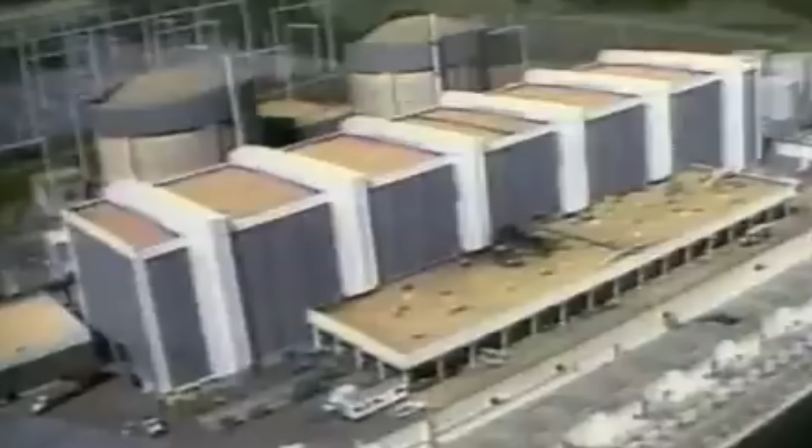Because frankly, even though it was a level 5 and was the worst accident involving a nuclear power plant in American history, it really wasn't that bad at all in the grand scheme of things.

But there were numerous failings that led to the accident, mostly involving proper training for the personnel, as well as a design flaw with a single valve.

But a true disaster was mitigated by a lot of automatic safety features that did work as intended. Thus, what happened at TMI is not classified as a full-tilt nuclear meltdown. It was a partial meltdown, and it was safely contained, thanks to the overall design elements of the reactor itself.

The 3 Mile Island nuclear power plant started construction in 1968, and would wind up with 2 different nuclear reactors. TMI-1, or Unit 1, would go online on September 2nd, 1974, and Unit 2, her sister, went online December 30th, 1978.

They were both built by Babcock and Wilcox, and both were PWR designs, or pressurized water reactors, but they were not identical twins. They were slightly different. Reactor 2 was larger than her older sister, but they worked in pretty much the same way.

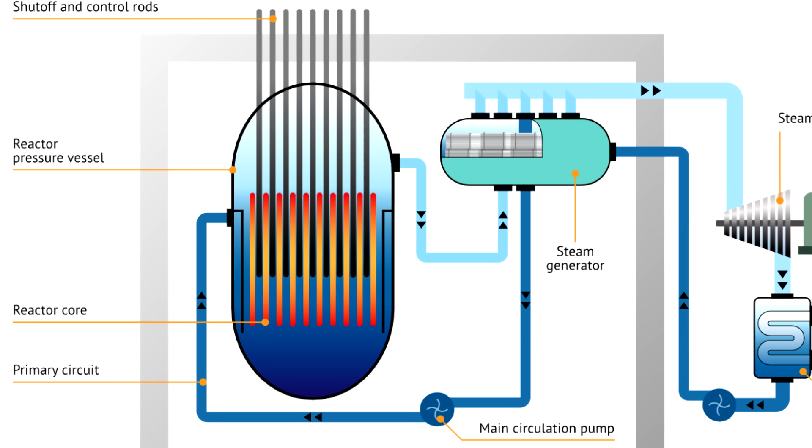A PWR differs quite a lot from an RBMK reactor that the Soviets used and was involved in the Chernobyl disaster. A PWR, pressurized water reactor, is a light water nuclear reactor, a type of thermal neutron reactor that uses just regular old water, not heavy water, just regular water that you would drink, as both the coolant and the neutron moderator. They also use a solid form of fissile elements as the fuel.

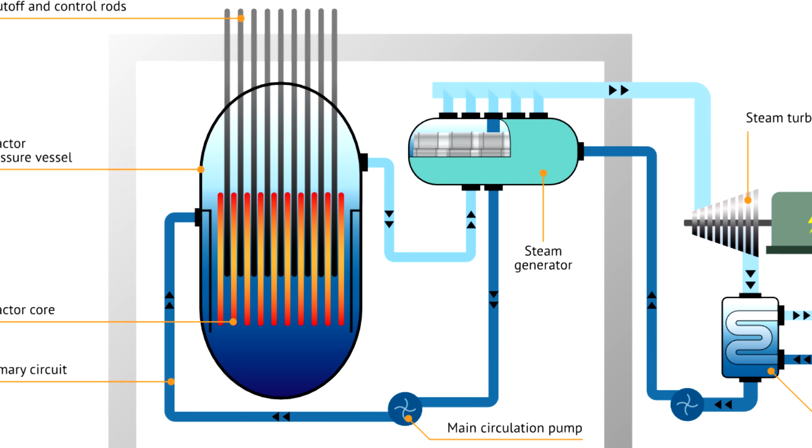PWRs are actually quite common and constitute a significant majority of the nuclear power plants all over the world. And the reason is simply that they're exceedingly stable and generally pretty safe.

The way these work is that the nuclear fuel in the reactor pressure vessel is engaged in a controlled fission chain reaction. That produces heat, which heats the water in the primary coolant loop. The primary coolant, which is water, is pumped into a heat exchanger, which is just a steam generator, which flows through several thousand different small tubes.

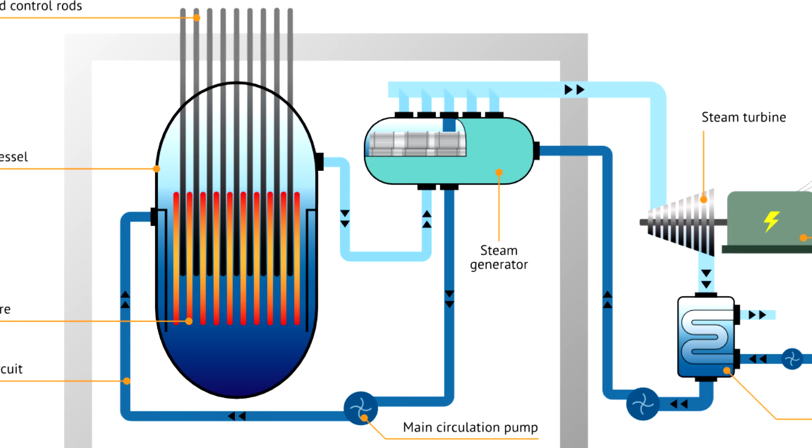The heat is transferred through the walls of those tubes to the lower pressure secondary coolant lines. The secondary coolant evaporates into pressurized steam, and as a result of this, the transfer of heat is accomplished without actually mixing the two fluids.

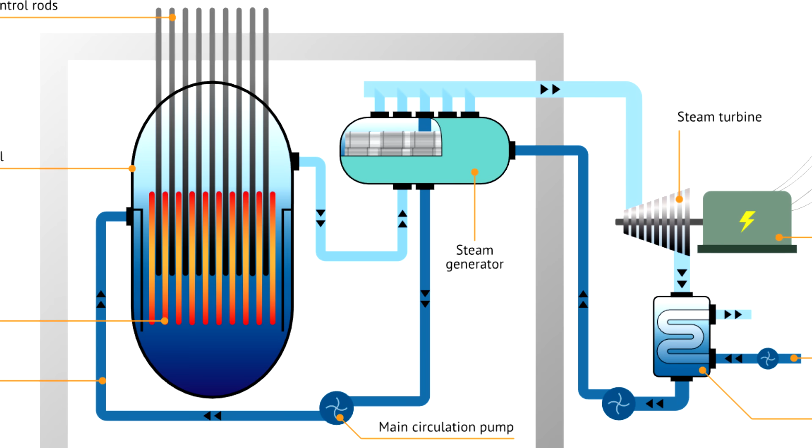Both sets of coolant water don't actually touch. And the reason for this is that it prevents the secondary coolant from actually becoming radioactive. Remember, the primary coolant loop is going through the reactor, so that water is becoming irradiated. But because it's not touching the secondary coolant, that water stays pure and only receives heat to become steam.

And the pressurized steam is fed through a steam turbine and produces electricity. It's a novel concept, and again, this type of design is extremely stable.

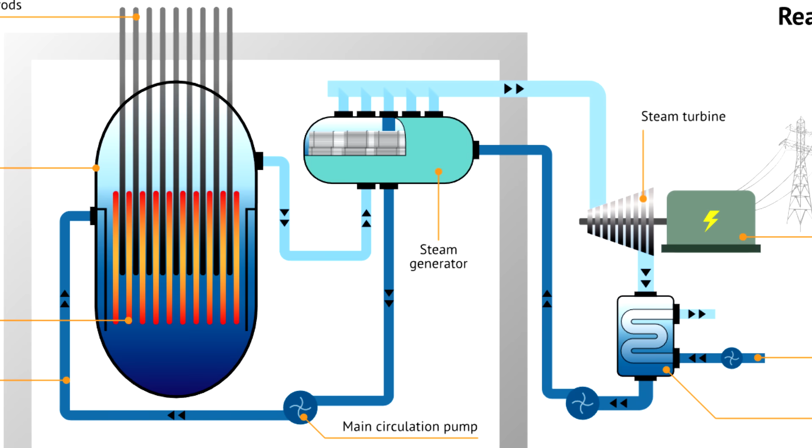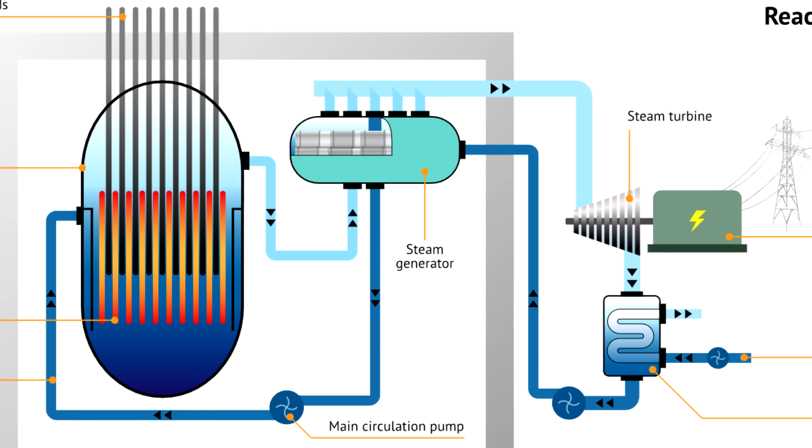Part of the reason is that they have a tendency to produce less power as the temperatures increase, which is good because part of the design requires the coolant to actually be quite hot all the time. That's why it's a pressurized water reactor.

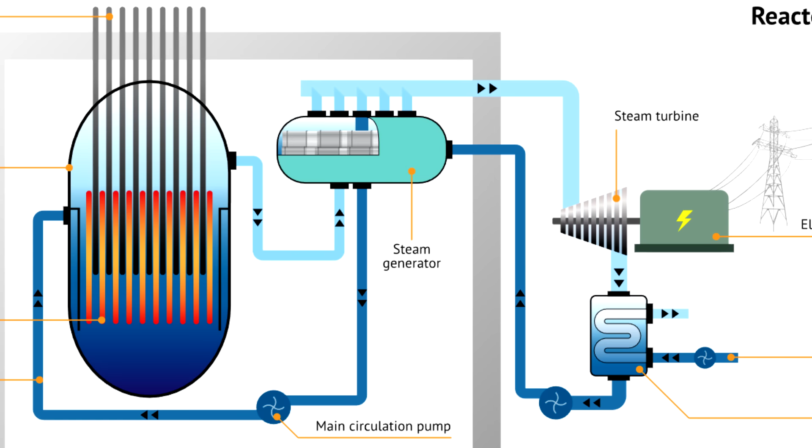Because the water has to be at a much higher temperature, it actually exceeds the normal boiling point of water. But it has to stay as a liquid in order for this system to work, which is why it's pressurized. Water under pressure doesn't become steam quite as readily as standing water would. If you pressurize it, it'll stay in a liquid state even if the temperature exceeds the normal boiling point of water. Thus, the whole system is highly pressurized, with PSIs into the thousands.

It can vary depending on what power output we're talking about, but much higher than, say, a steam locomotive, for example, that isn't a high-pressure design anyway.

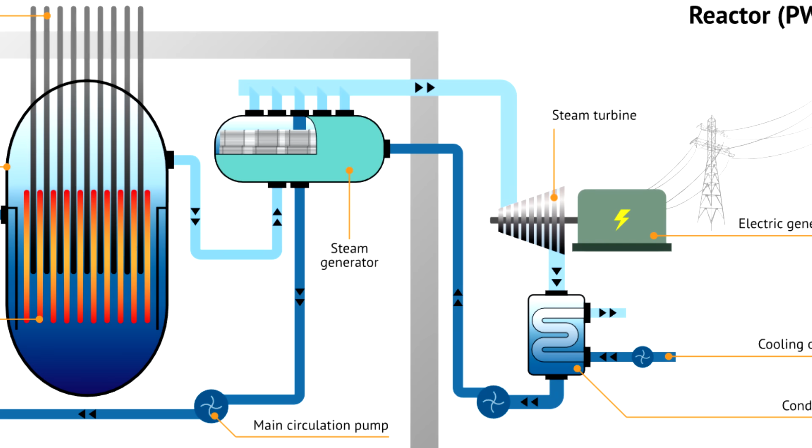But that means the system has to be very well built in order to contain all that pressure. The piping has to be extremely strong, and therefore it can be a lot more expensive to build this design in the first place, and it is also very susceptible to corrosion. You don't want corrosion on any of these pipes at all because of the higher pressure.

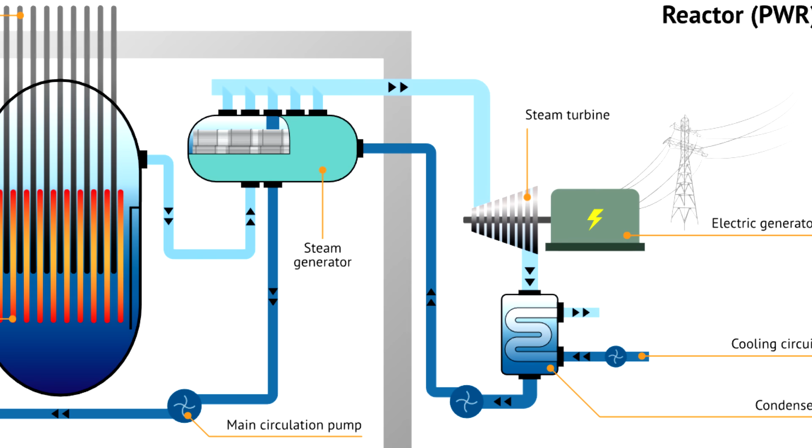Corrosion naturally weakens metal, and if metal weakens, you can get a burst, and that can result in what's called a loss of coolant accident, or LOCA. This is a very specific mode of failure for a nuclear reactor, and it can lead to reactor core damage, and is in fact pretty much exactly what happened at TMI. It was a LOCA, but it didn't start out that way. In fact, the situation was a cascade of rampant stupidity and silly mistakes.

The date was March 28th, 1979, though the actual situation started hours before. Reactor 2 was not very old. She'd only been commissioned in December the previous year. It was only a few months into operation, so she was effectively brand new. At the time, TMI 2, as she was known, was running at 97% power, almost full. The reason for this is that her sister, number 1, was off completely. She was shut down because they needed to refuel that one. So 2 was running pretty hot in order to pick up the slack.

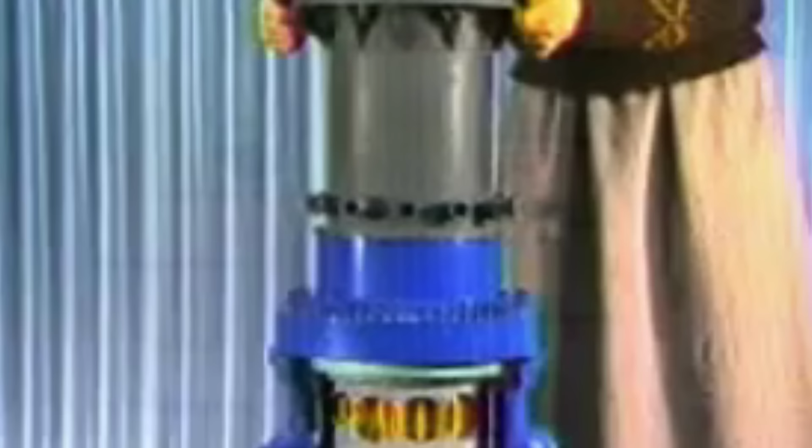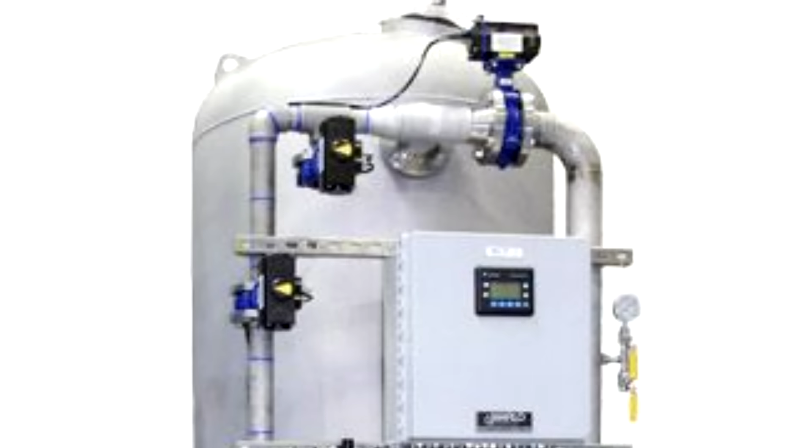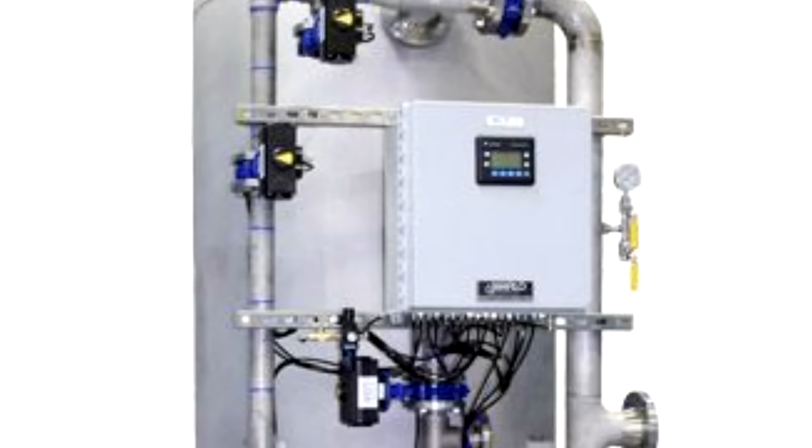The beginning of the chain of events that would lead to the accident actually started on March 27th, though, 11 hours before the actual accident started. What happened was the operators were doing what was effectively routine maintenance. They were trying to unblock one of the 8 condensate polishers. These are devices used to filter water condensed from steam, and their job was to keep the secondary loop within the reactor clean. But these polishers were resin, and they had a tendency to let little bits get into the water and cause blockages. This was a normal problem that was run into all the time at the plant.

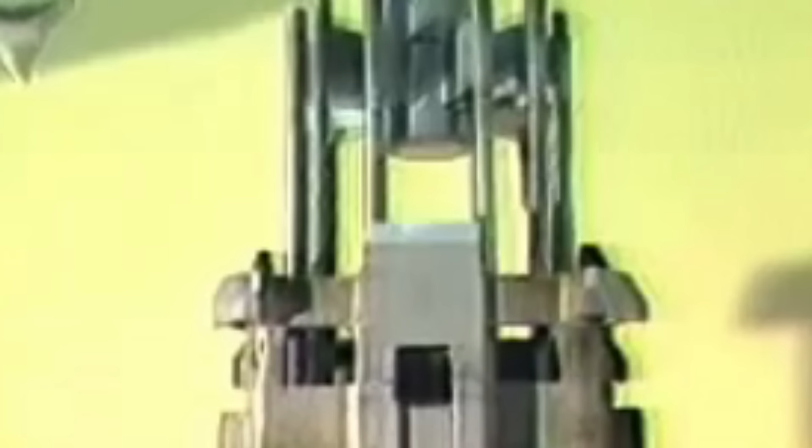The workers were pretty used to it, and generally what they did is use compressed air to force the blockage out. And in almost every case, that worked. But not this time. This particular bit of resin was very, very stuck, and the compressed air didn't make it budge. So they decided to incorporate water into the fix, and use the air to force the water forward and let the water, which was heavier, clear the resin. That did technically work. But in the process of doing this, they had unknowingly caused a very small amount of water to push through a stuck open check valve, and eventually come to rest into an instrument air line. It would lead to the accident beginning around 4 a.m.

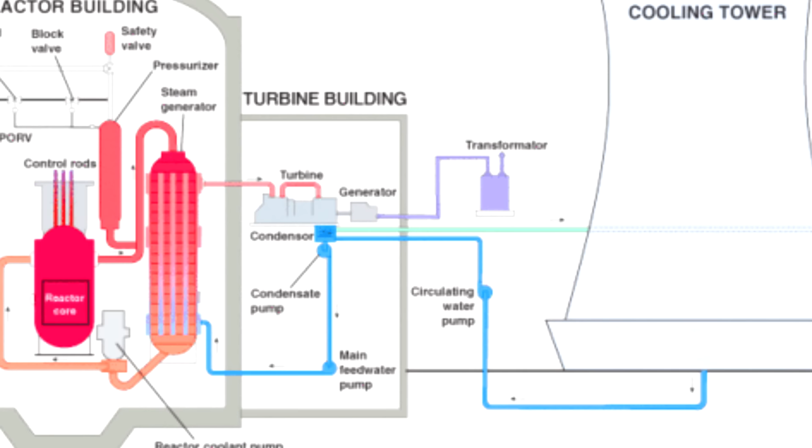Because of the water, the feed water pumps, condensate booster pumps, and the regular condensate pumps shut down all at once, leading to what's called a turbine trip. That is an automatic safety shutdown of the steam turbine that happens if really anything that's weird is detected within the system overall. It's a safety device to avoid turbine damage or any kind of problems. If there's something wrong that the system detects, it will just shut the turbine off until the issue is resolved. That on its own probably wouldn't have been a big deal, but the pumps being shut off was.

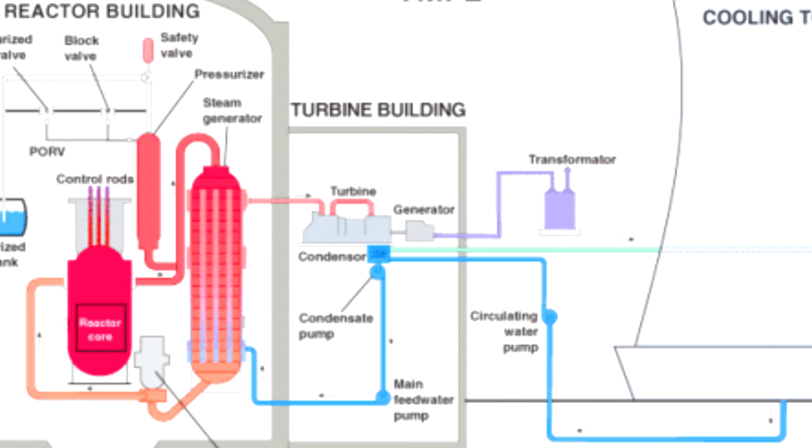Remember, water in a PWR is both a neutron moderator and the coolant. Getting fresh feed water into the system is imperative for stable function. With the pumps off, that came to a standstill, and the steam generators weren't receiving any feed water at all. So heat transfer from the reactor coolant system, or RCS, dropped significantly, and the temperature began to rise. With the temperature rising, the water expanded, as it naturally does, causing it to surge into the system's pressurizer. That caused a pretty large steam bubble to form at the top of it, and as the expansion continued, the pressure in the system rose to dangerous levels, up to 2,255 psi.

But, once again, there were safety devices in place just in case this sort of thing would happen. The system had what's known as a pilot-operated relief valve, or PORV. Once it reached the 2,255 psi, that valve was automatically opened. It was a safety valve, and it allowed the steam to escape through piping to the reactor coolant drain tank, which was located in the containment building basement.

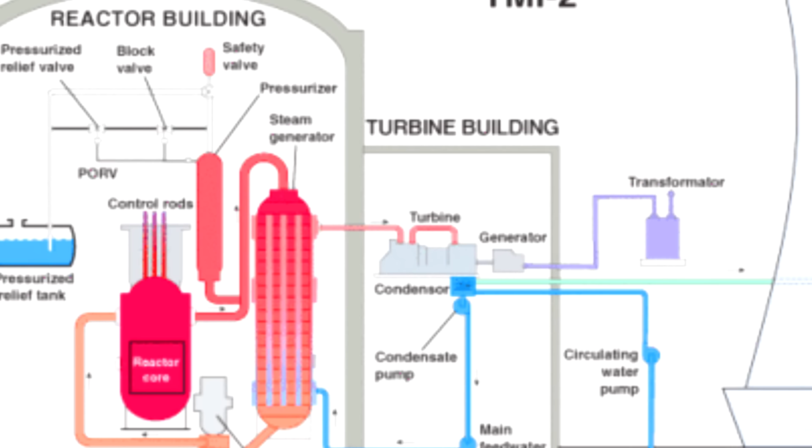But because of the excessive heat, the water continued to expand, and the relief valve wasn't removing enough of the steam to drop the pressure very fast, or at all. The pressure continued to rise, but fortunately there was yet another safety device that activated automatically in this type of circumstance. The Reactor Protection System, or RPS, had a trip set point of 2,355 psi. If that was reached, and it was just 8 seconds after the turbine tripped, the reactor itself was

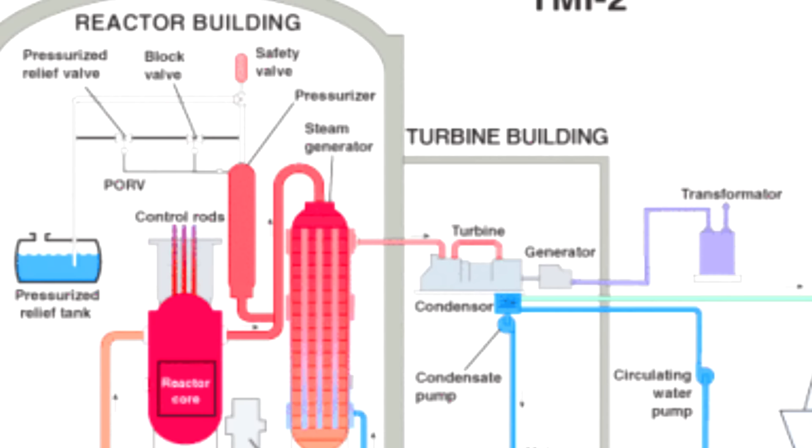also tripped. All the control rods were released and allowed to fall back into the core using the most reliable and abundant force available on our planet: gravity. They just fell back into the reactor. That's how it was designed. It was quite ingenious and simple. And the control rods worked. They did their job. They dropped into the core and halted the nuclear chain reaction, effectively shutting the reactor down.

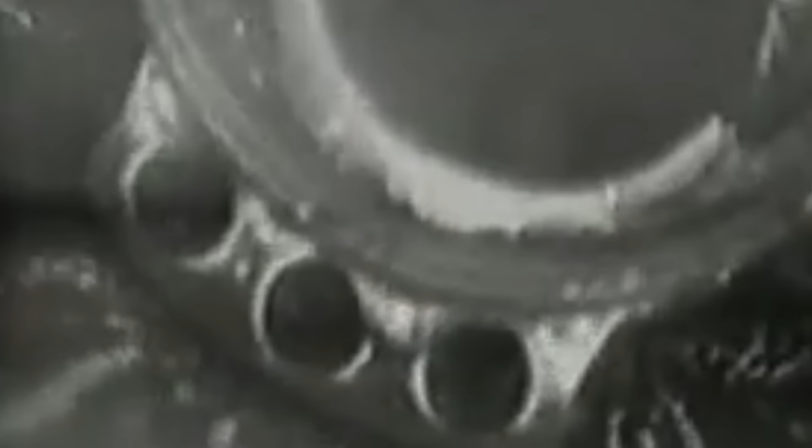But remember when I talked about Chernobyl, that in a nuclear reactor, even when it's technically turned off, it is still generating heat, and that's due to nuclear decay. This is a normal part of the elements involved here. You can stop the fission reaction, but the decay is still going to occur. It's not a lot in the grand scheme of things. It was only 6% of the power level prior to the shutdown, but it was still enough to continue supplying heat to the coolant water.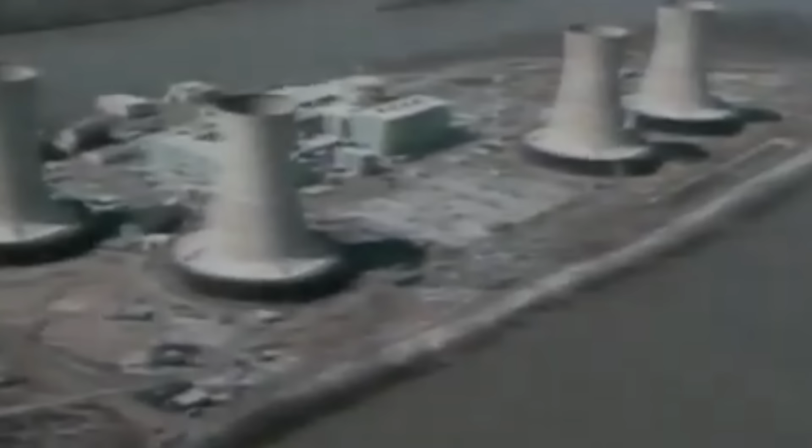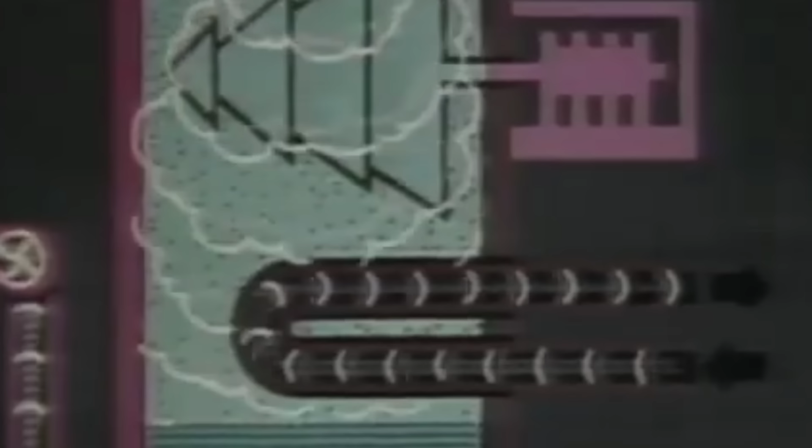Because the turbine had tripped, steam was no longer being used by it, because it was off. And remember, there was no new feed water going to the steam generators. While the decay heat was relatively small compared to what they had been dealing with, there was really nothing cooling down the water, and there was still something providing heat to it. In these circumstances, heat removal had been restricted only to steaming the small amount of water remaining in the secondary side of the steam generators to the condenser using the turbine bypass valves. That was it.

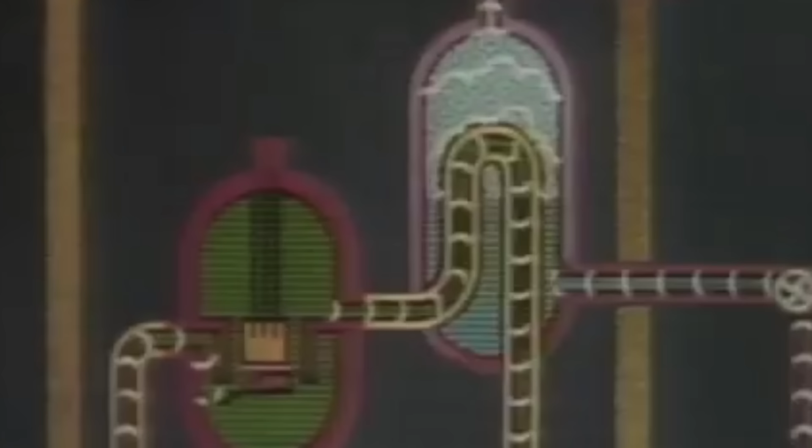And to be clear, everything I've explained thus far, and will explain probably over the next 10 or 15 minutes, happened in just seconds. So if you're wondering what the operators are doing, well, they were mostly trying to figure out what was happening, because all of this just happened at once. When the feed water pumps were tripped and shut off, they did have 3 emergency feed water pumps turned on. That should have been putting fresh water back into the system, and one of the operators did note that the pumps were running. It was one of the things they checked.

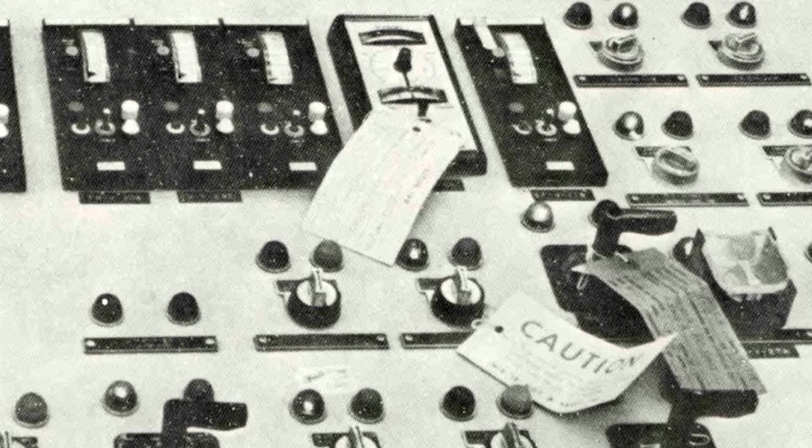However, there was a small, minor issue that they did not notice. See, there were block valves on the lines that went to the emergency feed water pumps, and those were closed. They were not supposed to be closed. Ever, pretty much. In fact, there was a very clear rule within the Nuclear Regulatory Commission, NRC, that dictated that in order for those block valves to be closed whatsoever, the reactor must also be shut down. It's never been definitively proven why they were closed, though it's suspected they may have been accidentally left closed during a surveillance test that happened just 2 days prior.

Regardless, well, wasn't there some kind of indicator light showing that they were shut, that operators would have realized that this was a problem? Well, yes, there were 2 lights in the operator's room that showed whether or not those were closed. However, one was covered by a yellow maintenance tag. Thanks for that. And the other one, well, it's never been actually proven why he didn't notice the other one, because that wasn't blocked by anything.

Except maybe, okay, this theory has never been proven definitively, and it sounds so stupid, but given how stupid the whole situation was, I could almost believe it. Some people suggest that he didn't see it because it was covered by his own large beer gut, because he was a bigger guy. Again, never been proven, but how would you like that? How would you like to know that you nearly caused a nuclear disaster because of your fat gut? Like, 600-pound life's got nothing on you, buddy. I am so sorry. But again, that's only a theory that may just be made up, and there's a lot of made up stuff about TMI.

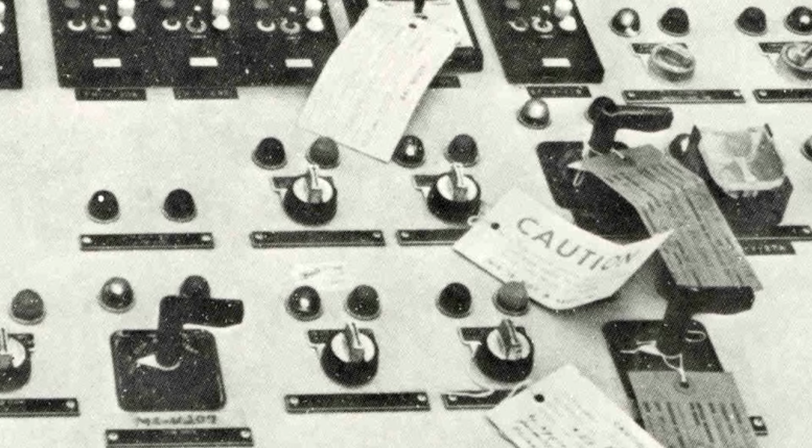Either way though, the operator didn't notice that those valves were closed, meaning that even though the emergency feed water pumps were running, no new feed water was getting to the system. They couldn't get past the closed valves.

After the reactor tripped, the secondary system steam valves were activated to reduce steam generator pressure and the temperature, thus cooling everything down. That was by design. It was supposed to do that.

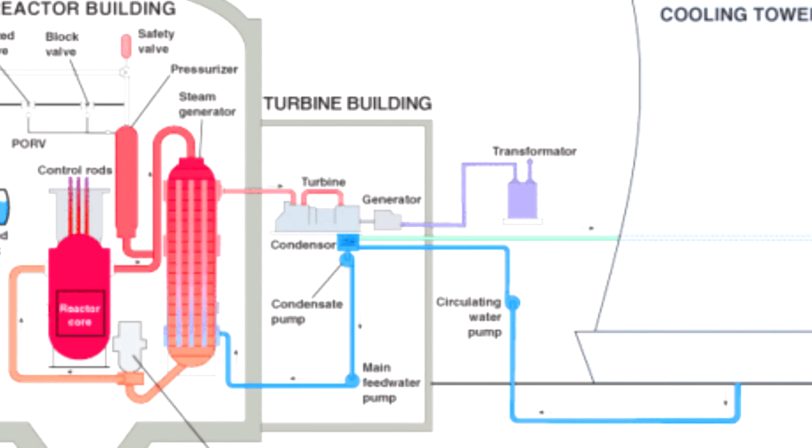And the pressure continued to go down, dropping all the way to 2,205 psi. So things seemed to be getting back under control, and that amount of pressure was the reset point for the safety valve, the PORV, remember. When pressure dropped that far, the valve was supposed to be closed. Automatically, the electric power to the solenoid that opened the valve was cut, and therefore, by design, it was supposed to shut again. But the PORV was stuck open.

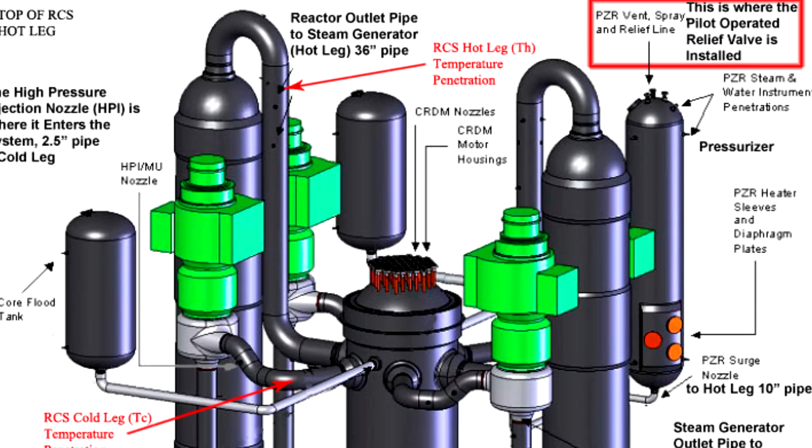And this was a major problem. This was the critical failure, right here. A single, stuck open valve. Because it was open, it continuously allowed coolant water to escape the system. And the problem was, the operators had no idea this was even going on because of another major design flaw with the PORV. Babcock and Wilcox were aware, through testing, that the valve could get stuck in the open position,

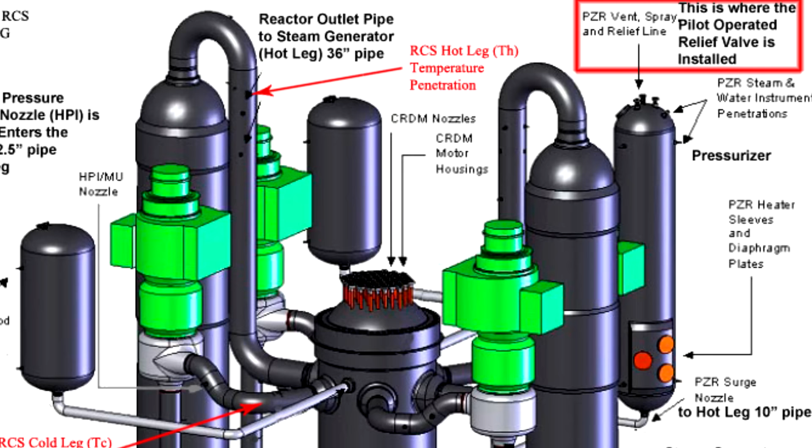and that was bad. So, in order to compensate for this, a light had been installed that turned on when it was open. So they had an indicator light. Did they not notice it? Oh no, they did, because it went off when the power was cut to the solenoid, and only when the power was cut. It didn't actually keep track of what position the valve was in, only whether or not electricity was going to the solenoid.

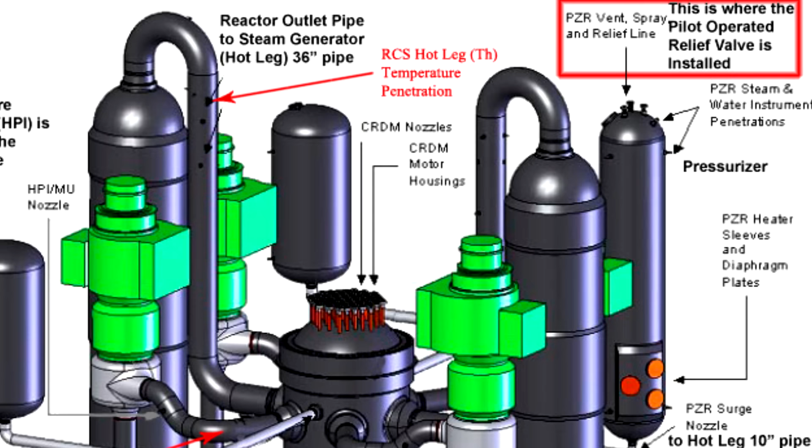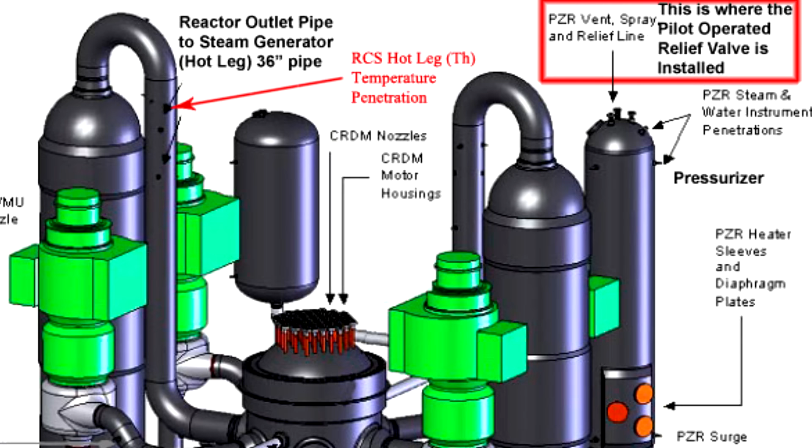Because of that, the light did go off even though the valve was still open. So the operators thought it was closed, when in reality it wasn't an accurate indication of the valve's position whatsoever. Because of this, over the next few hours, the operators were incredibly confused regarding the status of the system in general. They couldn't properly diagnose what was even happening because they thought the valve was shut.

And they weren't necessarily inept, they just hadn't received proper training for a lot of the situations they were facing. They didn't know how ambiguous that light was. Their understanding is that it was very reliable and should be trusted. They didn't know how it worked exactly. And had they known, they might have been aware that it only told them that electricity wasn't going to power the valve, not that it was guaranteeing it was actually closed.

It was very stupid. With the PORV in the open position, coolant kept being lost from the RCS. And as the operators kept track of the situation, the water level in the pressurizer was rising, but the RCS pressure was falling. Which was really friggin' weird. It didn't make any sense to them. They'd never seen anything like it. They'd never been trained for anything like it.

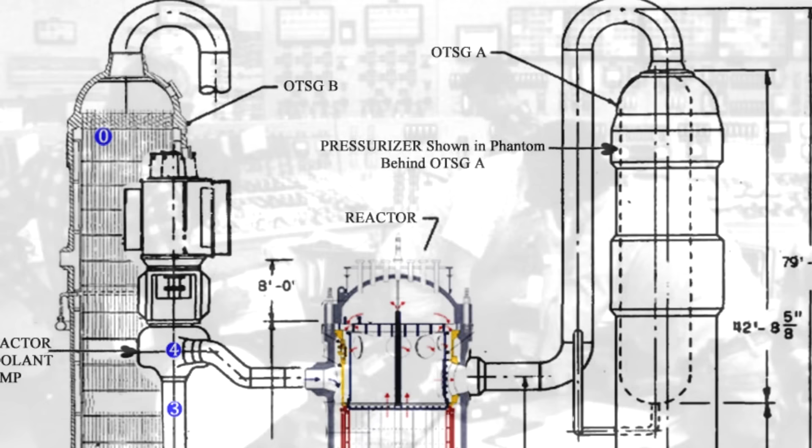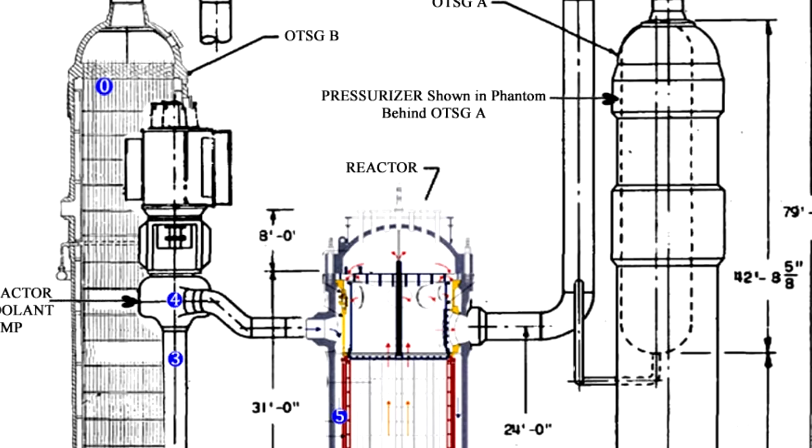Because the valve was stuck open, this was a loss of coolant accident, a LOCA. And the expected and trained for symptoms of a LOCA were drops in both pressure and the water level. Everything should be falling, because the coolant's leaking out, so of course everything should go down, right? But the numbers were going in the opposite direction of each other, like it didn't add up. Like what is happening here? They didn't know, and they had never been trained, and there were no procedures in place for handling that kind of situation. And you're probably wondering, why was that happening?

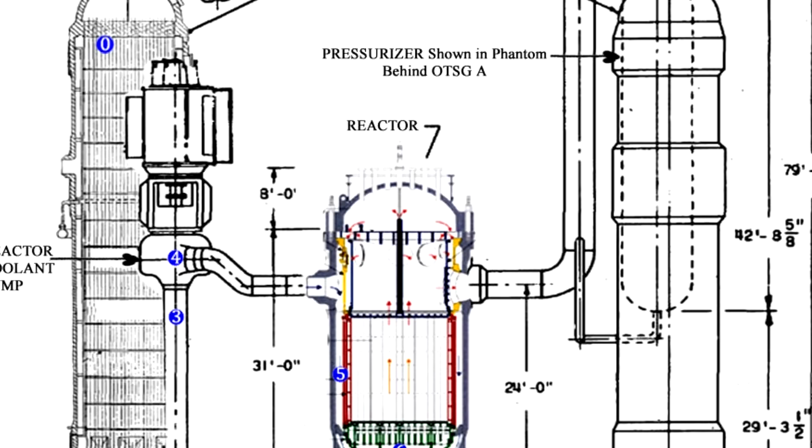Well, the water level in the pressurizer was rising because the steam in the space at the top that had formed earlier was being vented through the stuck open valve. As a result, that was lowering the pressure, but allowing the water to rise. Because of the lowered pressure, the water from the coolant loop was permitted to surge in and create another steam bubble in the reactor pressure vessel head. The operators had no idea there was a steam bubble there at all. And once again, they hadn't been trained for it.

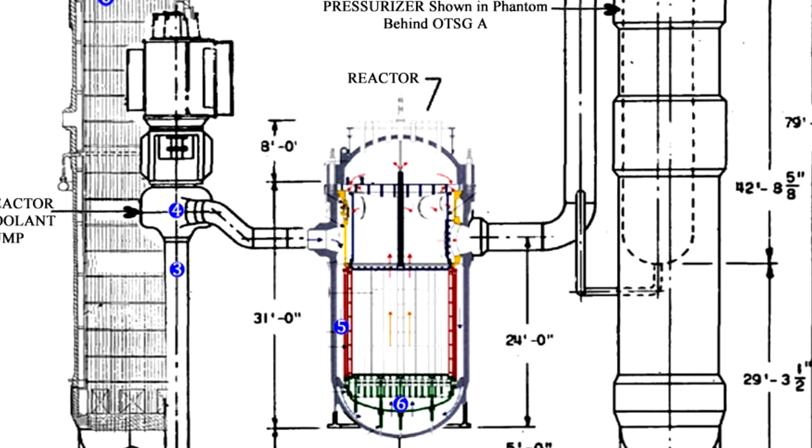And the information they were receiving was talking about high water levels and lowered pressure. And with the information they had to work with, they were more worried about the loop going solid, which is a term used to basically describe the system in a state where there's just no steam at all in the pressurizer. They had been trained very clearly to never let that happen, so they were trying to avoid that when that wasn't even the issue. But because they thought they had too much water, they decided to turn off the emergency core cooling pumps.

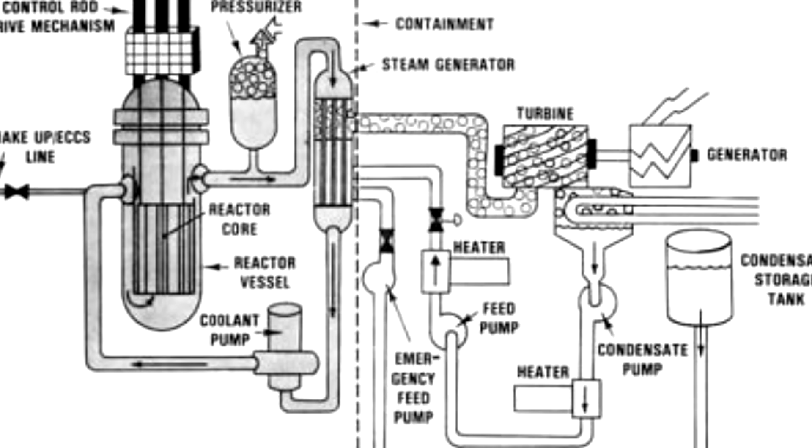Because the coolant was just allowed to spill out of this stuck valve, the relief tank that was being filled overfilled and spilled all over the place, causing an alarm to go off at 4:11 a.m. But it was ignored at first, even though all of this was a very clear indication of an ongoing LOCA event. But they had tunnel vision.

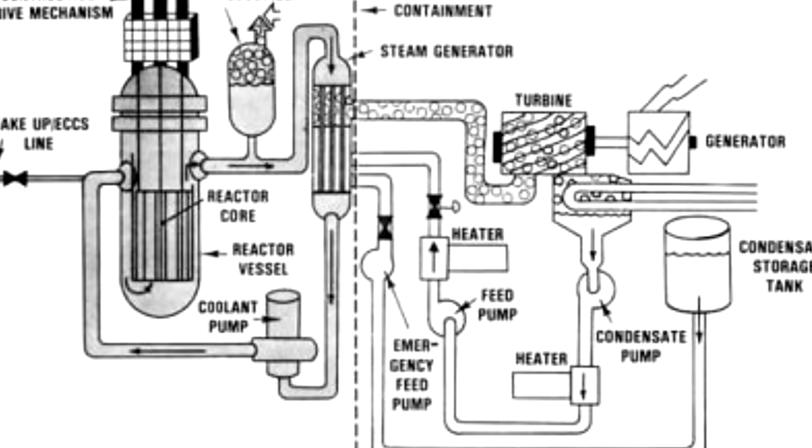At 4:15 a.m., the relief diaphragm of the relief tank ruptured, allowing radioactive coolant to leak into the general containment building. The radioactive coolant would also be pumped from the containment building sump to an auxiliary building outside of the main containment area, and that didn't stop happening until 4:39 when the sump pumps were turned off.

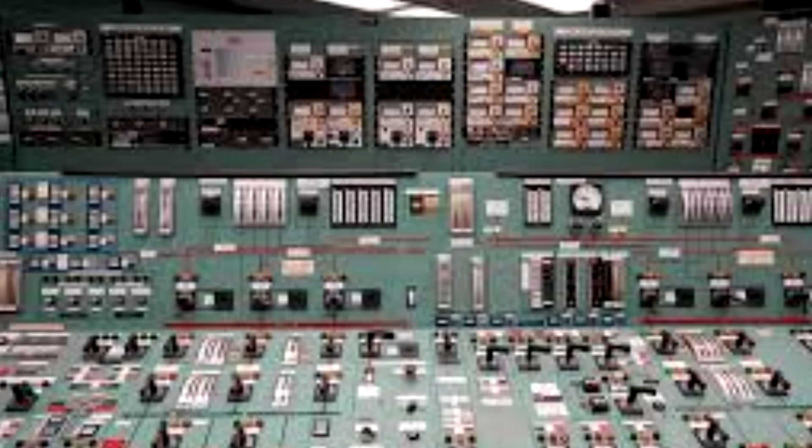Please understand that the operators were completely confused and bewildered. They just didn't know what was happening, and it took them a while to figure it out. In the meantime, their reactor was not doing so hot. Well, actually, scratch that — she was getting way too hot.

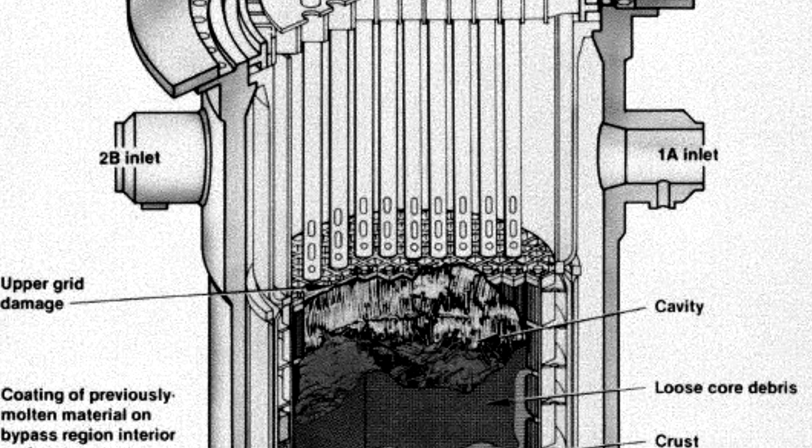At about 5:20 a.m., after 80 minutes with a growing steam bubble in the reactor pressure vessel head, the coolant water in the primary loop began to cavitate. Cavitation, in fluid mechanics, refers to a phenomenon in which the static pressure of a liquid reduces to below the liquid's vapor pressure, leading to the formation of small vapor-filled cavities in the liquid.

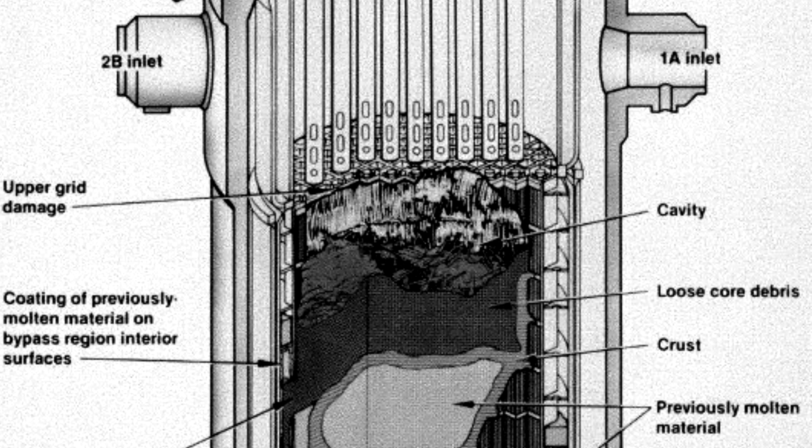Basically, this water, which was supposed to stay water in the primary system, became a mixture of steam bubbles and water, which passed through the 4 main reactor coolant pumps. The pumps were turned off, and the operators thought natural circulation would continue water movement through the core. However, because of the steam in the system, which wasn't supposed to be there, the water couldn't circulate at all. It was brought to a standstill, and because it wasn't moving, it started converting to steam at a much faster rate, which only got worse over time.

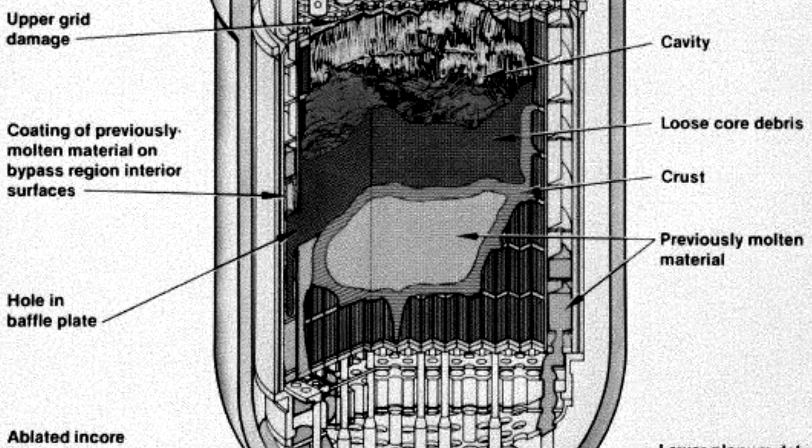The temperature continued to rise to an alarming level, and eventually the top of the reactor core became exposed. A reaction occurred between the steam forming in the core and the zircaloy nuclear fuel rod cladding, a zirconium alloy. The reaction resulted in zirconium dioxide, hydrogen, and even more heat, which melted the fuel rod cladding and damaged the fuel pellets, releasing more radioactive isotopes into the coolant and producing hydrogen gas.

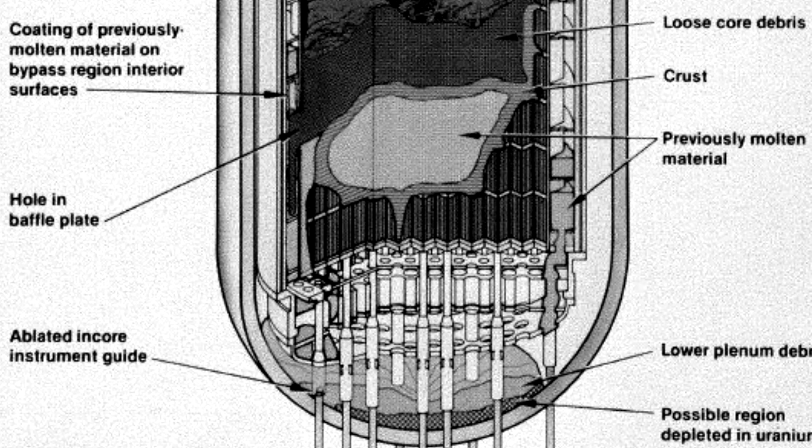It was not good, and the control room had no idea that was happening whatsoever. They didn't realize their reactor was in the process of melting, and at 6 a.m. there was a shift change. Now, how would you like that? You just came in for your morning shift at the nuclear plant, and third shift tells you, yeah, we got problems.

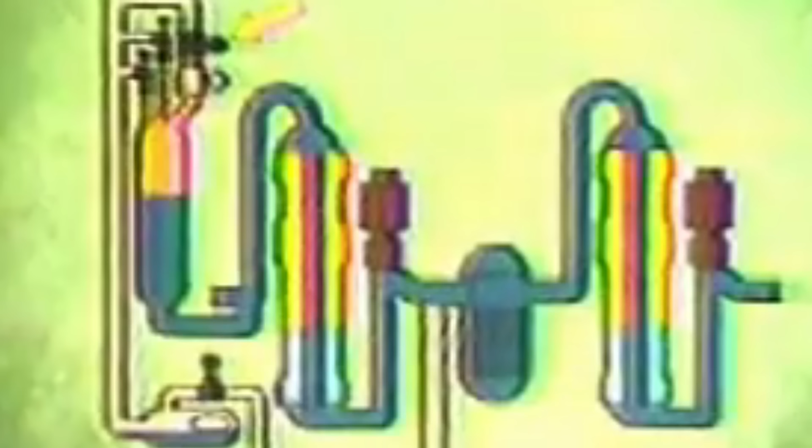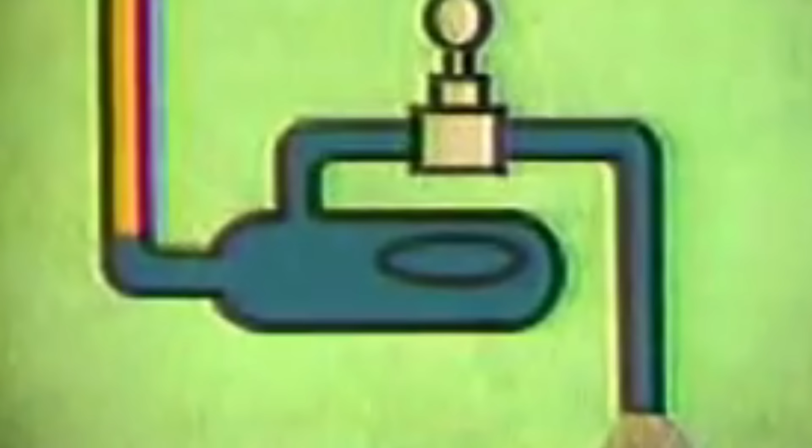You haven't even finished your morning coffee, and all of a sudden there's a major crisis. You just showed up. But with fresh eyes on the scene, it was noticed that temperatures in the PORV tailpipe and the holding tanks were really, really high. As a result, they utilized a backup valve to shut off the coolant venting out of the PORV, finally stopping the LOCA. But by that point, it had been allowed to vent nuclear junk all over the place, in excess of 32,000 gallons.

At 6:45 a.m., the radiation alarms in the plant began to sound, because the contaminated water had reached the detectors. The radiation levels in the primary coolant water were 300 times the expected levels, and the general containment building for the reactor suffered serious contamination, with radiation levels in excess of 800 Roentgen per hour.

At 6:56 a.m., one of the plant's supervisors declared a site area emergency, and less than half an hour after that, the station manager, Gary Miller, announced a general emergency. Three Mile Island was operated by a company called Metropolitan Edison, or Met-Ed, and when informed of the ongoing crisis, they immediately notified the Pennsylvania Emergency Management Agency, or PEMA.

PEMA would turn right around and contact state and local agencies, including the governor of Pennsylvania at the time, Richard L. Thornburgh, as well as the lieutenant governor, William Scranton III. Thornburgh decided he was going to pull Scranton from all his other duties and ask him specifically to focus on this exact crisis. He would be responsible for collecting and reporting information about the incident to the press and to all relevant parties. It was Scranton's ballgame.

Okay, great. But Scranton's job was made significantly difficult. He received a lot of flack for his handling of the situation, but it really wasn't his fault in any way, because he was getting conflicting information. Like, a lot of conflicting information.

He would hold a press conference in which he reassured everyone that there was no immediate danger, but then he also mentioned a small release of radiation and also no increase in normal radiation levels, which doesn't seem to make any sense. Those statements were also contradicted by another official, and by statements from Met-Ed, who both claimed that no radioactivity had been released. So the whole thing was a mess.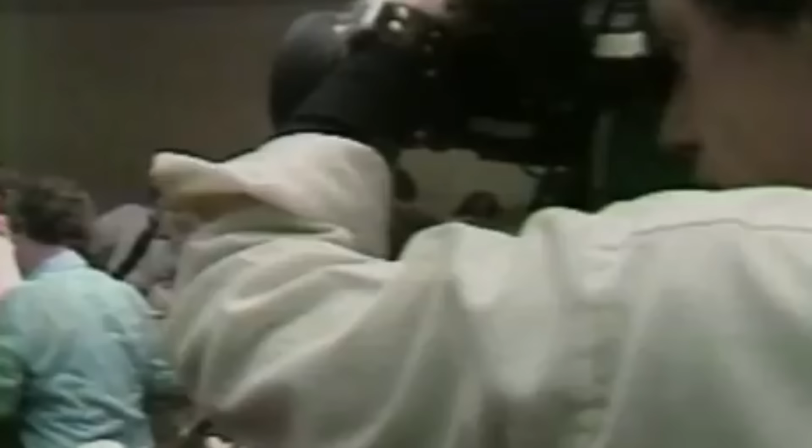Because of the conflicting statements surrounding the incident, people were worried. Schools were closed and residents were urged to stay indoors. Farmers were also asked to keep their animals under cover and on stored feed. Because of Met-Ed's inconsistency and everything going on surrounding the issue, the state authorities had gotten the Nuclear Regulatory Commission involved.

The NRC, based on the advice of their chairman, Joseph Hendrie, decided to suggest the evacuation of pregnant women and preschool-aged children within a 5-mile radius of the plant. By March 30th, the evacuation zone was extended to a 20-mile radius.

But a mandatory evacuation was never ordered, and frankly never needed. It was always a voluntary evacuation, and 140,000 people did leave the area to err on the side of caution, though most people chose to remain and were never forcibly removed. The vast majority of those who had chosen to leave would return home within the following month.

As for the Nuclear Regulatory Commission's part, they had been informed of the incident directly by Met-Ed, and had already activated their emergency response headquarters located in Bethesda, Maryland. From there, they dispatched their staff to the facility to investigate the issue directly.

Both Joseph Hendrie and the commissioner, Victor Gilinsky, initially viewed the accident as cause for concern, but not alarm. A 3.6. Not great, not terrible.

Gilinsky was tasked with briefing reporters and members of Congress on the situation, and he also talked to the White House staff. But the NRC was running into severe roadblocks because, frankly, they weren't really prepared to deal with such emergencies. This was a learning experience for them because they realized they actually had a pretty bad command structure.

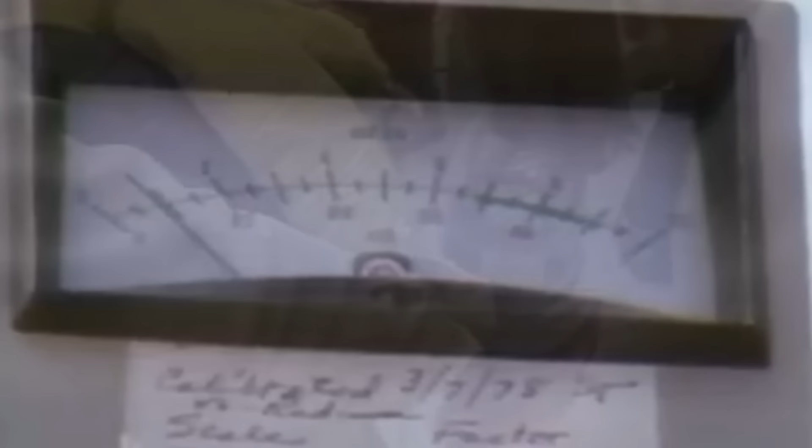Basically, they just didn't have one. No one really knew who was in charge, nor did they have the authority to order Met-Ed to do anything, or to force an evacuation. They could advise, but no one was technically under any legal obligation to listen to them, which was a significant issue. Granted, again, an evacuation wasn't necessary, but the point is, had it been necessary, the NRC would not have had the authority to make it happen.

Back in the control room of the plant, they were still busily trying to figure out what was even wrong. They didn't know that the primary loop water levels were low, and that over half of the core was exposed. In order to get more reliable data, a group of workers would take manual readings from the thermocouples, as well as getting a hold of a sample of the primary loop water.

Seven hours into the emergency, they finally pumped new water into the primary loop, and the backup relief valve was opened to reduce the pressure so that they could fill the loop completely with water as it should be. After 16 hours, the primary loop pumps were also switched back on, and the core temperature began to drop.

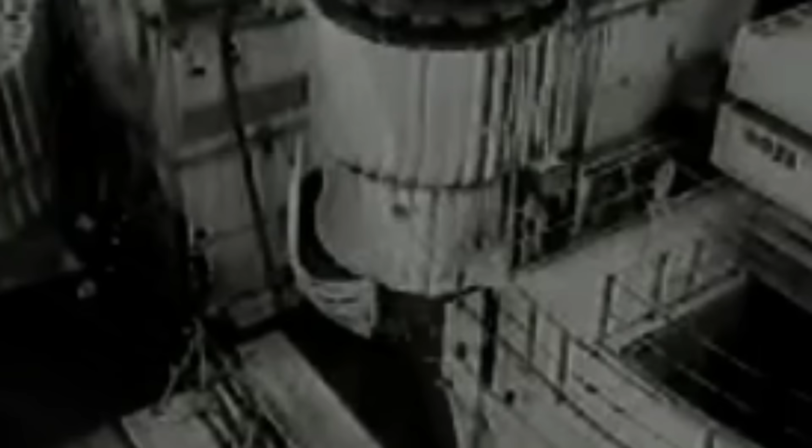By that point, and they didn't know it until much later, the core had partially melted, but it had been halted. That said, they were still concerned about a lot of factors because they still didn't know exactly how damaged it was. They didn't even know it had melted. On March 29th, they decided they really needed to ensure the integrity of the reactor vessel, that it would keep whatever was going on inside of it.

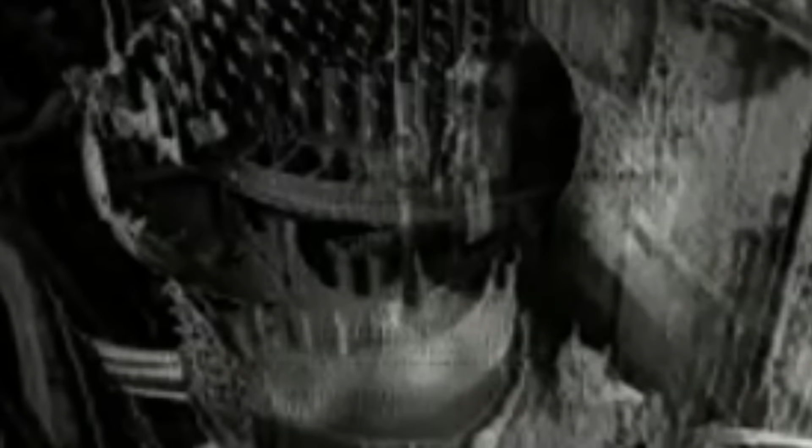But in order to accomplish that, someone needed to get a boron concentration sample. With that data, they could check to see if there was enough of it in the primary system to shut down the reactor entirely. The problem with doing that is, in order to get that sample, they had to go into a rather radioactive area.

This was a dangerous job, and Unit 2's chemistry supervisor, Edward 'Ed' Houser, volunteered to draw the sample when no one else stepped up. The shift supervisor, Richard Dubiel, requested that Pete Velez, the radiation protection foreman for Unit 2, go with Hauser. His job would be to monitor airborne radiation levels while Hauser focused on getting the sample. The intention was to make sure neither of them would be overexposed during this job.

They donned excessive amounts of protective clothing. They gave them everything they had, which turned out to be quite a lot: 3 pairs of gloves, 1 pair of rubber boots, and a respirator. And the pair headed into the reactor auxiliary building to get the sample they needed.

Hauser managed to lose his pocket dosimeter while he was taking the measurements, but he was able to note that the sample he got looked like Alka-Seltzer, as he described it, and it was also very, very radioactive, with readings as high as 1,000 roentgens an hour. They only remained in that building for about 5 minutes and left as soon as they could.

Fortunately, neither one was overly irradiated, but Hauser would wind up going past the NRC quarterly dose limit for radiation exposure, which was just 3 rems back in 1979. He had received 4, and he was only allowed to come back to work the next quarter.

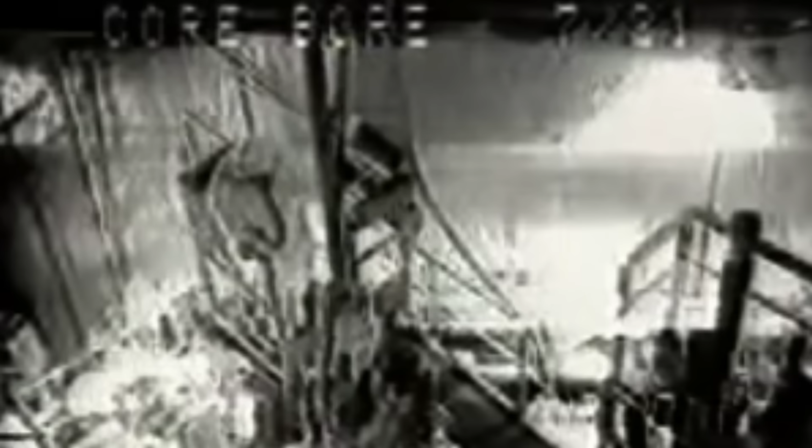On the 3rd day after the accident, the staff finally realized there was a hydrogen bubble inside of the reactor. That was a concern, because a hydrogen explosion could... well, it's an explosion. I don't think I have to explain why that would be a really bad thing.

But through investigation, they realized there was no risk of this. While hydrogen is exceedingly flammable and can be explosive, it needs oxygen to facilitate that. On its own, hydrogen won't burst into flame; it needs oxygen to actually burn. And the hydrogen bubble was underneath the dome, where there was no oxygen.

So they relaxed a bit, but still decided to err on the side of caution and reduce the size of the hydrogen bubble. By just the next day, it was way smaller, and slowly, over the following week, they removed both steam and hydrogen from the reactor, using a catalytic recombiner and by simply venting it out.

In terms of the radioactive contamination, that had happened when the cladding was damaged while the PORV was still stuck open. As a result, fission products were released into the coolant and allowed to escape the system through the stuck-open valve. But fortunately, very few of the fission products that were actually released remained solid at room temperature.

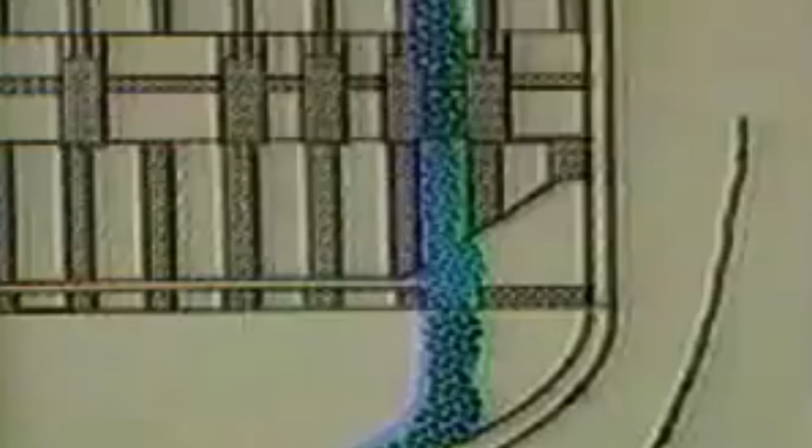The result of this is that radiological contamination to the outside environment was relatively small. No significant level of radiation was attributed to the accident outside of the facility. Nothing really got out. There was a little bit, a very small amount, but most of the radioisotopes that were released were noble gases like xenon and krypton, and that resulted in an average dose of 1.4 millirems, not even a full roentgen, to the 2 million people near the plant.

To be clear, that amount of radiation received by them is basically nothing. Some of you may have had chest x-rays before. The average dose from a chest x-ray is 3.2 millirems, so it wasn't even a chest x-ray. And on average, just by existing, going outside, being hit by the sun, you receive roughly 310 millirems a year annually. So basically, yes, this was a nuclear accident, but outside of the plant it didn't really do anything.

They still chose to be cautious though, and the EPA, Environmental Protection Agency, started a process of sampling the environment at 3 stations closest to the plant. They would establish more monitoring stations by April 1st, which would later be expanded to 31 by the 3rd.

They took continuous samples to make sure there was no significant increase in radiation, and found that there wasn't—maybe a little bit, but not enough to matter. Estimations showed it wasn't even enough to cause a single additional death from cancer among people in the area. It didn't even do that much. Other individuals also tested it.

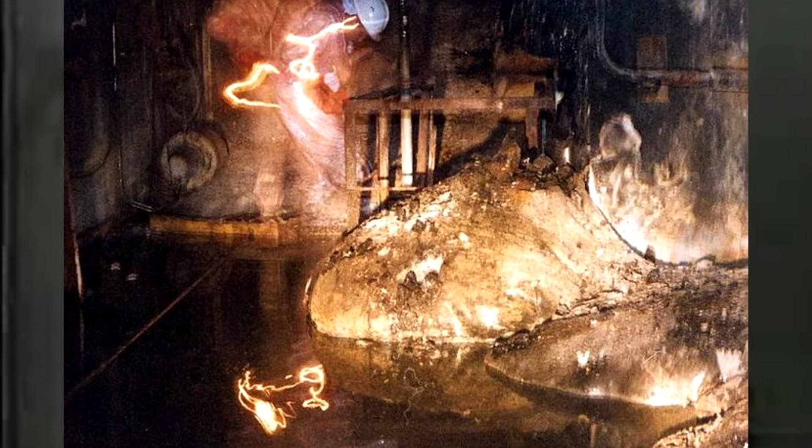Further investigations show that about half the core had melted, and the cladding around 90% of the fuel rods had completely failed. Five feet of the core was gone. That's 18 tons of uranium that melted down and flowed to the bottom head of the pressure vessel, forming into corium, the spicy lava.

But they did note that many of the safety features in the design of the reactor had worked, mainly that the reactor vessel itself, the second level of containment after the cladding, had maintained its integrity despite the meltdown, and contained the damaged fuel with nearly all the radioactive isotopes remaining safely inside, not escaping and potentially contaminating the surrounding area.

They also discovered that there had actually been a small hydrogen explosion during the meltdown. It had jolted the reactor. That probably happened about 2 p.m., but that part has been a little bit disputed, as it seems to be less of an explosion and more of a simple hydrogen burn. Either way, it wasn't noticed. It didn't really do much of anything and only lasted between 12 and 15 seconds and didn't actually release any radioactive material. Again, the containment vessel stayed in one piece, so even if there was a small explosion, it didn't actually matter much.

But anti-nuclear political groups disputed the Kemeny Commission's findings, because one of the big problems that surrounded TMI, and still does to this day, that causes the whole thing to be rife with misinformation, has mostly to do with hippies. It's always the hippies! Would you people shut up and get educated? Sorry, I get frustrated with these morons who say things without knowing anything.

One of these individuals was Arnie Gundersen, who you'd think would know better because he was a former nuclear industry executive, but he was a strong anti-nuclear advocate, and he would make multiple comments about TMI that are frankly insane. He said, 'I think the numbers on the NRC's website are off by a factor of 100 to 1,000.' Really? If they were off by that much, people would be vomiting and suffering radiation burns.

Nothing like that happened. And he's the one that pushed the idea of a hydrogen explosion that caused a high dose of radiation to occur. He went beyond this and claimed that the blast was actually very strong, and that the control room shook and doors were blown off their hinges, which absolutely zero eyewitnesses corroborate whatsoever. This man is a fool.

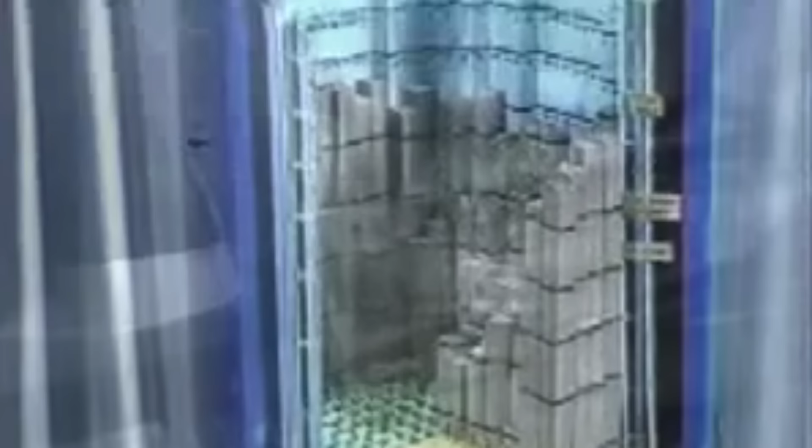But all in all, what was proven at TMI, at the very least, and this should be praised, was that the safety systems, the automatic ones, for the most part, outside of that stupid safety valve, worked. Can you imagine how bad this would have been if a significant majority of those fail-safes just hadn't been there or hadn't functioned? How many times during that story did I say 'this thing happened automatically'? It was designed to be as safe as possible. Obviously it was flawed, and this was an accident, but because of all the safety systems in place, it didn't result in a complete and utter disaster. The contamination was restricted to inside that plant, and basically nowhere else.

But that didn't stop anti-nuclear activists from going crazy and holding protests and demonstrations demanding that we stop using nuclear power. It's dangerous for us. Quick, make more coal plants. Those are notoriously clean. Frickin' hippies, man.

One demonstration happened in New York City and involved 200,000 people in September of 1979, with speeches given by Jane Fonda and Ralph Nader. Oh boy, I can't wait to hear from those two.

How you doing, Hanoi Jane? You gonna tell us more about how the North Vietnamese definitely weren't horrifically torturing our armed forces? Go on. Tell us. Tell us, Jane!

It was obnoxious, though several lawsuits were filed, and won in favor of the citizens affected by the TMI accident. This was due to the fact that it still put them at risk, so they won a $25 million out-of-court settlement in 1981. Part of that money was used to found the TMI Public Health Fund.

Additionally, in 1983, a federal grand jury indicted MetEd on criminal charges for falsification of a safety test result. That happened prior to the accident. MetEd would eventually come to a plea bargain agreement and pled guilty to a single count of falsifying records, and no contest to 6 other charges. 4 of those were dropped. They had to pay a $45,000 fine and set up a $1 million account to help with emergency planning in the area surrounding TMI.

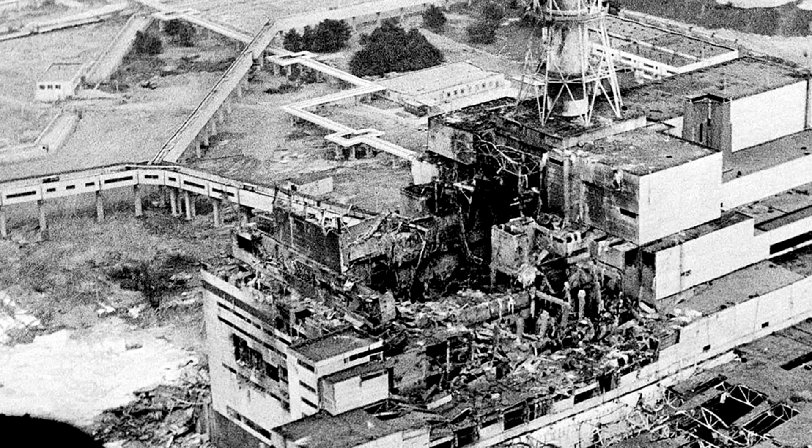The real nail in the coffin for a while was Chernobyl, though, because that had been a genuine, complete, and total disaster that legitimately got people killed. That didn't happen in TMI's case, but the point is, it scares people. Radiation is a scary concept. Ionizing radiation is a very scary concept, because it's invisible, it's tasteless, you can't see it. But it will kill you. And people have an understandable fear of the unknown.

You know, say someone comes at you and points a gun in your face. That's pretty scary, you know? But at least you can see the person holding the gun in that circumstance. Radiation doesn't work this way. So people are naturally scared of it, even though, in the case of TMI, a lot of the safety systems worked well and mitigated things, stopping it short of becoming a complete and total disaster. People still live right next to the plant, and can.

And also, while it was decided that reactor number 2 was damaged beyond repair, reactor number 1 would be later reactivated. After the accident, the license to operate TMI-1 was suspended by the NRC, pending investigations into the management of the plant overall. By 1982, citizens of the 3 counties surrounding the site all voted overwhelmingly in a non-binding resolution to retire the remaining unit permanently.

But in 1985, a 4-1 vote by the Nuclear Regulatory Commission allowed them to resume operations because, frankly, they decided that the citizens were only saying, no, don't turn it back on, because they were scared of something they didn't understand. And their votes didn't actually matter in this case, because it wasn't a binding resolution. It was basically a petition. But the NRC decided that there was nothing wrong with turning Reactor 1 back on. And truth be told, there wasn't. Nothing really major at all ever happened with Reactor 1. She would plug along just fine for many years as the cleanup of Reactor 2 continued.

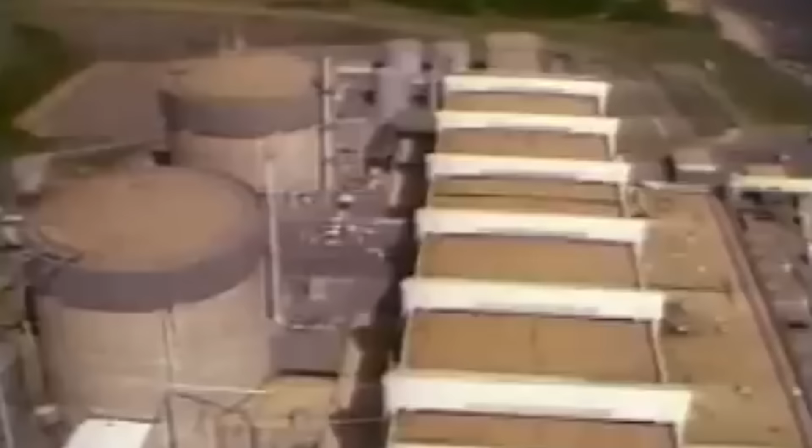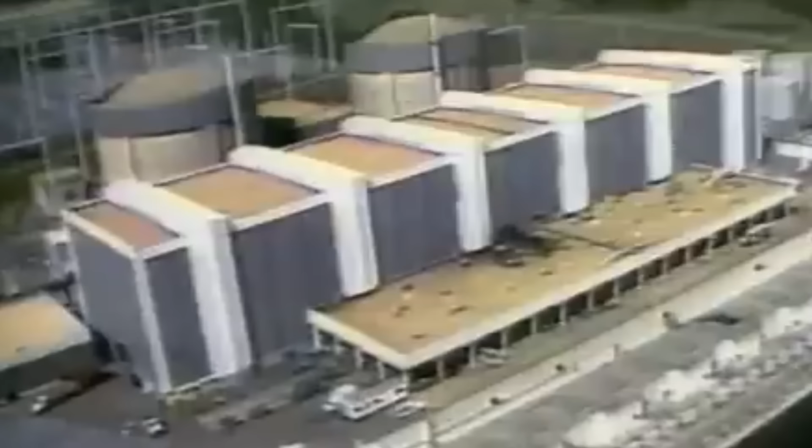A solid reminder of how careful we do have to be with nuclear power, but also, I would say, a reminder of how well we can prepare for a disaster. Again, a lot of the safety features worked, and despite it being a partial meltdown, we can still live right next to the plant without a problem. That said, I still think we should be careful. You know? Definitely don't want to do what the Soviets did.

Haha! Take that, by the way, Soviet Union, you filthy communists! Our worst nuclear accident is nothing compared to what y'all did. We don't know what an exclusion zone is and why. We didn't need one. Take that! To capitalism!